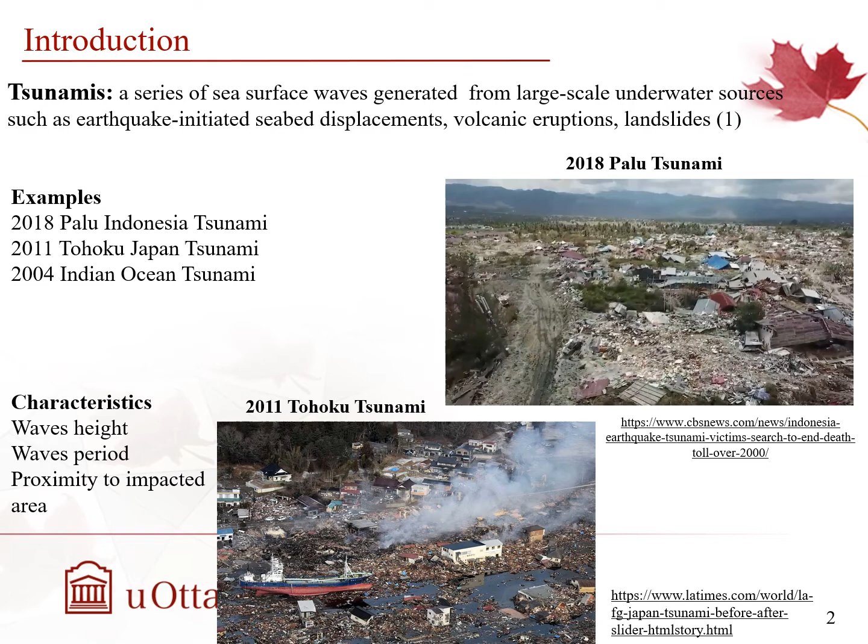In my study, we tried to see how different bore depths and also bed slope and bed conditions can impact on hydraulic characteristics and pore pressure variation and scour erosion around this structure. For this purpose, we measure time history of flow velocities and water surface elevation with different tsunami-like bore depths and two different bed slopes and two different bed conditions, which were

wet versus dry. Also, we measured the time history of pore pressure variation around the column at the same time with measuring the scour development around the same column as we had identical hydraulic condition, two bed slopes and two bed conditions.

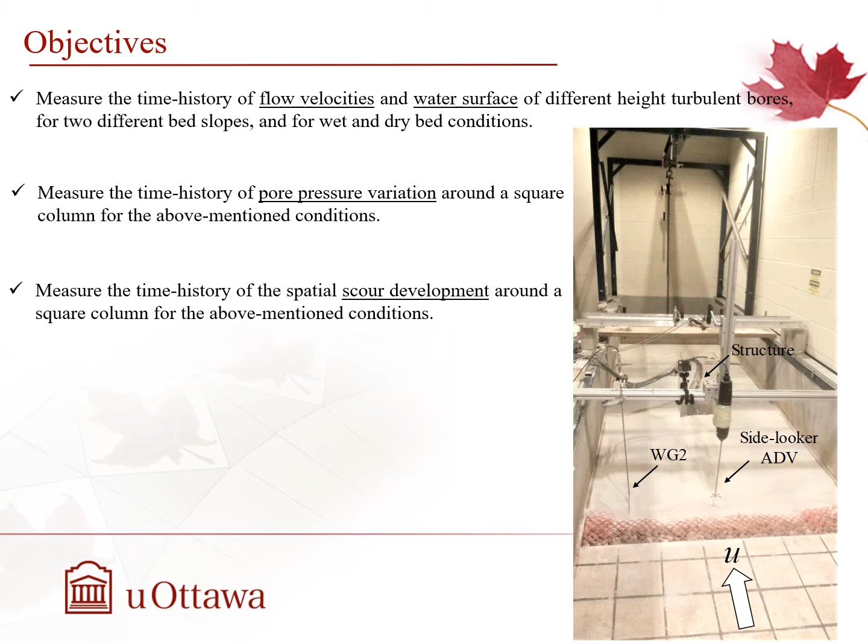Before starting my study, I tried to see what kind of related investigation happened in the past. I realized that in 2019, McGovern and his colleagues performed multiple experiments to see how tsunami-like waves can impact on scour development around the building, which was placed in horizontal bed. And these waves were generated using a wave generator.

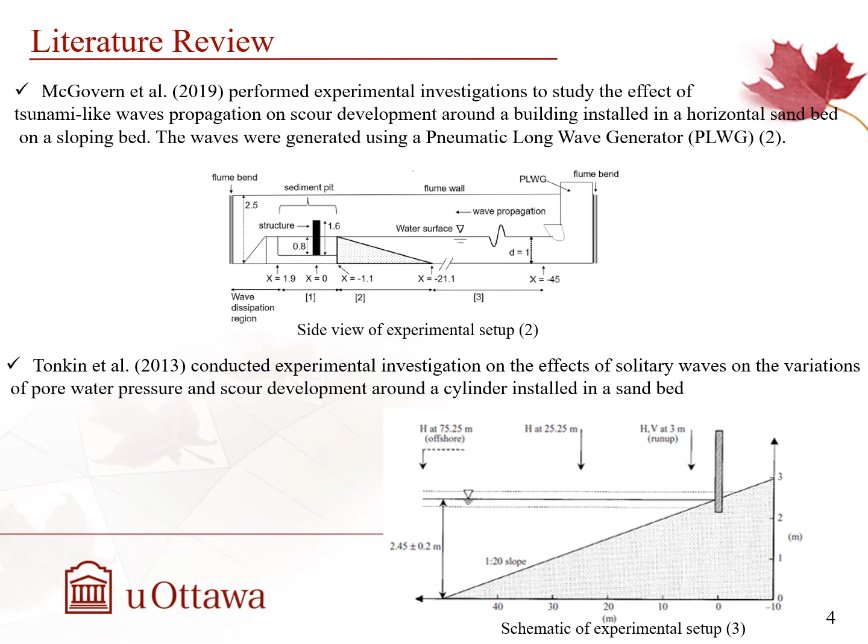And finally, in 2008, Nakamura and his colleagues also did experimental investigation to realize how solitary waves and isolated waves are impacting the variation of pore pressure and scour development around the structure installed in horizontal bed.

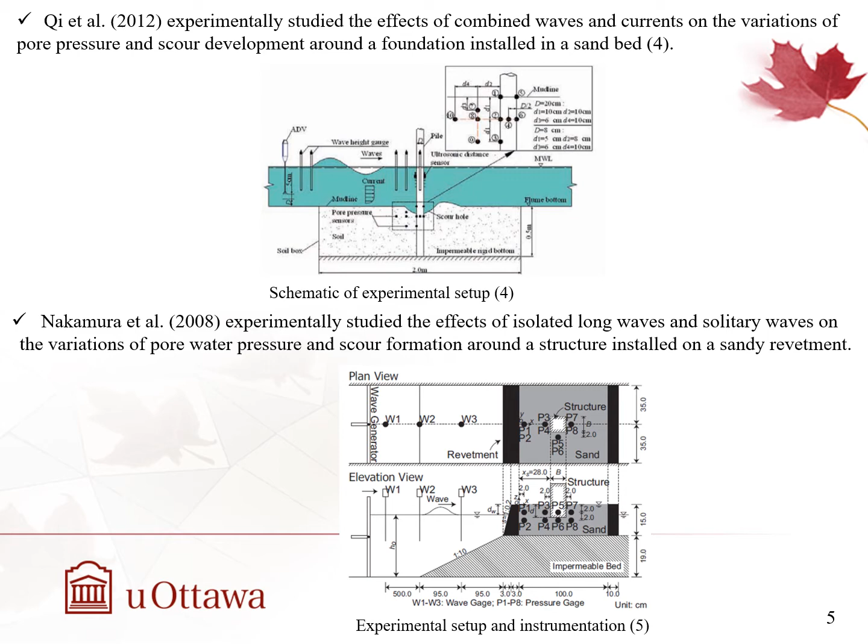By analyzing the conducted investigations in the past, I realized that in all cases, tsunami bores were simulated as solitary waves, currents, regular waves, or isolated waves. And the analysis of some field investigations showed that these kinds of waves cannot experimentally represent real tsunami waves. However, the analysis of this field investigation showed that the dam break method is the only method to replicate tsunami waves in experimental scale acceptably.

On the other hand, looking at the previously conducted experiments showed that in some cases they just look at the scour or they just put the column, like their structure, in horizontal bed. This is where novelty came into my research. We use the dam break method in order to simulate tsunami waves in experimental scale, as in terms of the hydraulic characteristics, dam break waves and real tsunami waves have acceptable agreement with each other.

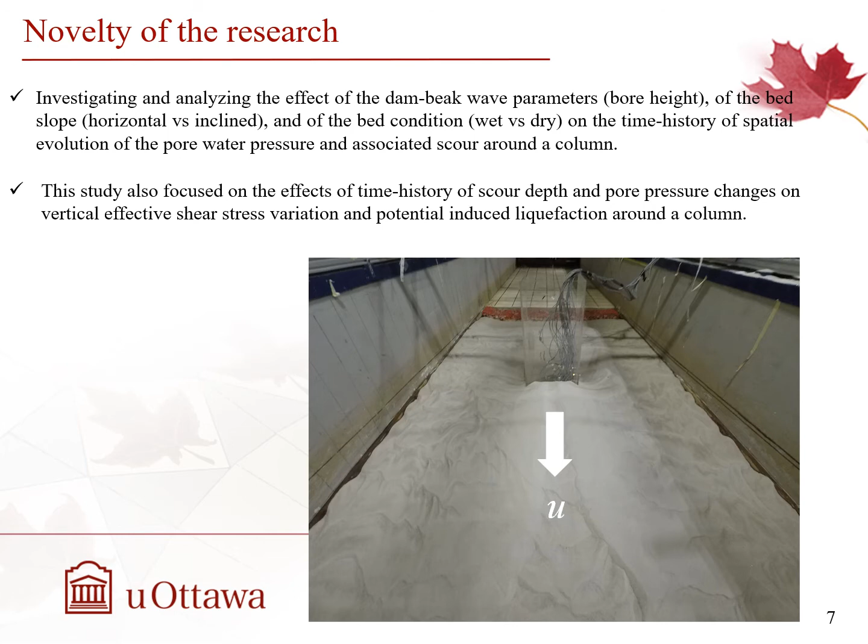On this slide, you can see the experimental setup and instrumentation that I used to perform these experiments. I did my experiment in the hydraulic lab at the University of Ottawa, and there is a flume with a length of 30 meters, which has an almost 22-meter reservoir, and right after that, we installed a swing gate, and after the swing gate, we had an upstream false floor with the purpose of calculating bore front velocity and bore surface velocity. At the end of the flume, we had a downstream false floor, which helped us to have a framework for implementation of a sediment section.

And right at the center of this section, we placed a transparent column, and by putting one camera inside, we have been able to record the time history of scour evolution around the structure. We installed 19 tensiometers on the front side of the structure in order to collect the time history of pore pressure variation for this face, and by rotating this column 90 degrees, we recorded all these numbers for the side face.

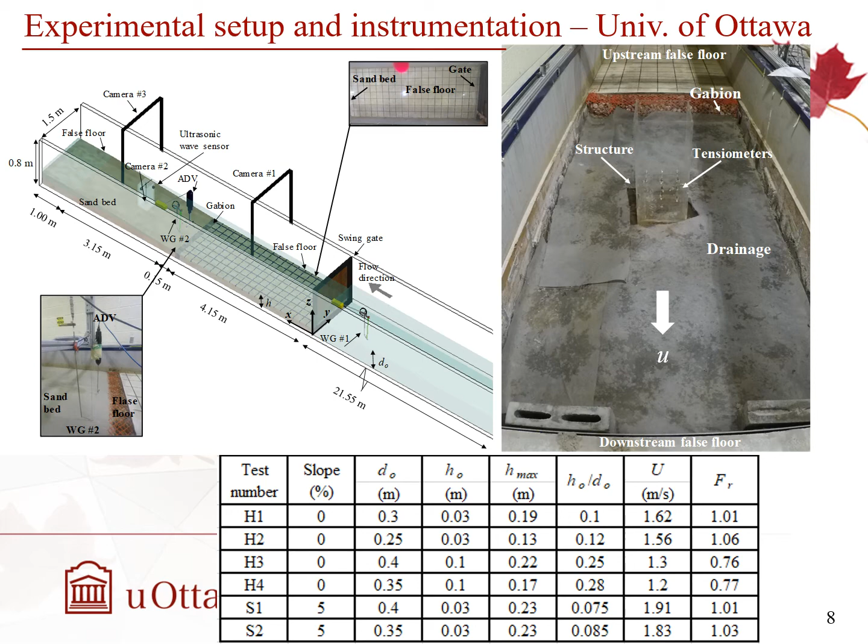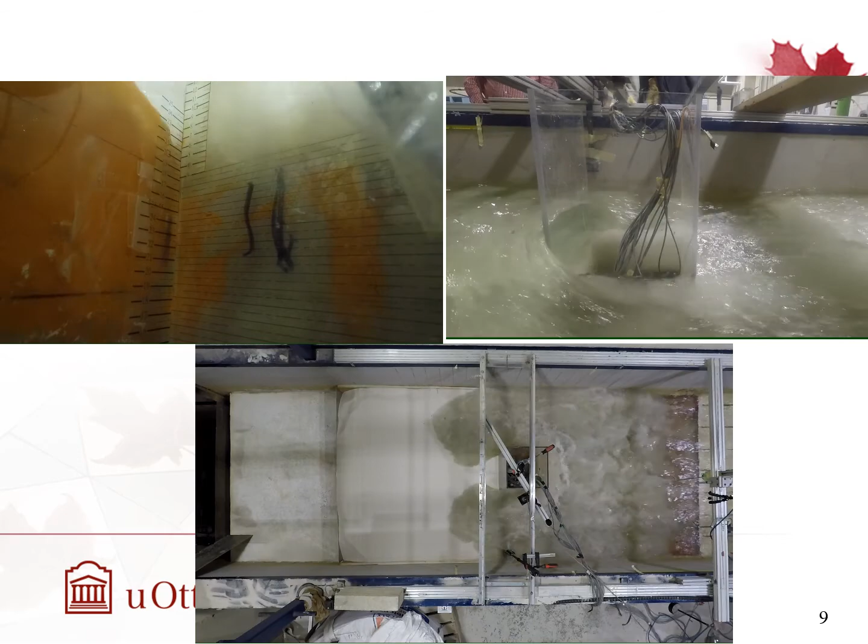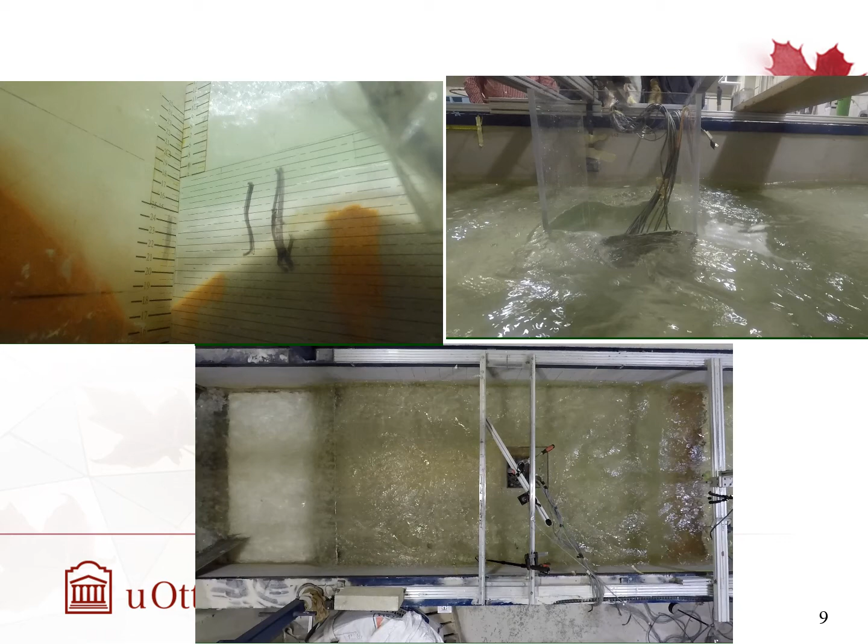As we had different bore depths, two different bed slopes and two different bed conditions, we had different flow velocity and flow depth, which gave us different Froude numbers. So based on these different Froude numbers, we categorized our experiments into supercritical flows and subcritical ones. As you see in this slide, once we open the gate, the dam break bore is generated, and it traveled and propagated over the sediment section, and by its propagation, scour happened and pore pressure changed at the same time.

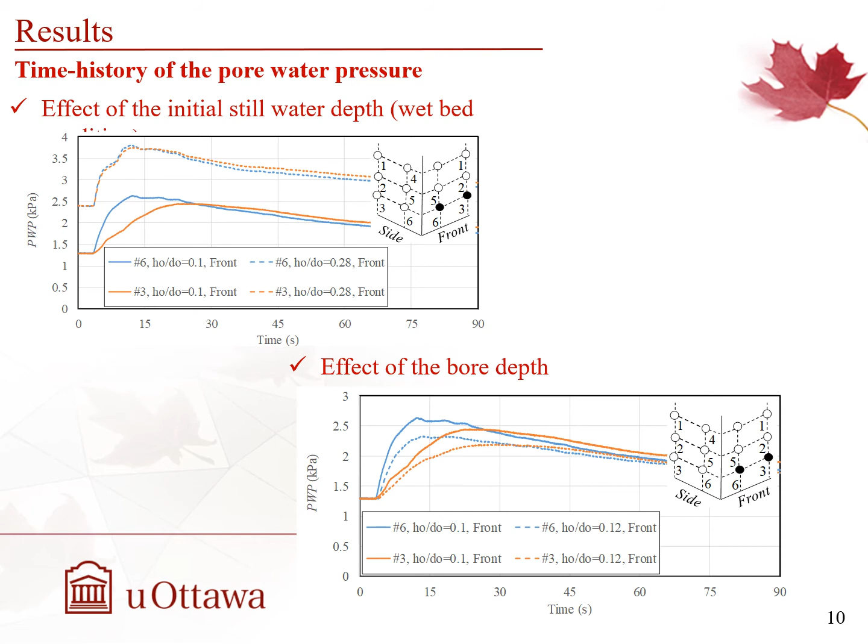Once we collected all these data and numbers, we started to analyze them. First of all, we started with pore pressure variations. In terms of the effect of initial still water depth, we figured out that as we increase initial still water depth, we had greater pore pressure values around the structure. Moreover, as we increase bore depth, we had larger pore pressure values around the structure.

In terms of the effect of location of tensiometers, the analysis of collected data showed that regardless of bore depth and bed slope, the front face of the column always showed greater values of pore pressure compared to the side face. Moreover, we realized as we increased bed slope by 5%, the values of pore pressure around the structure doubled.

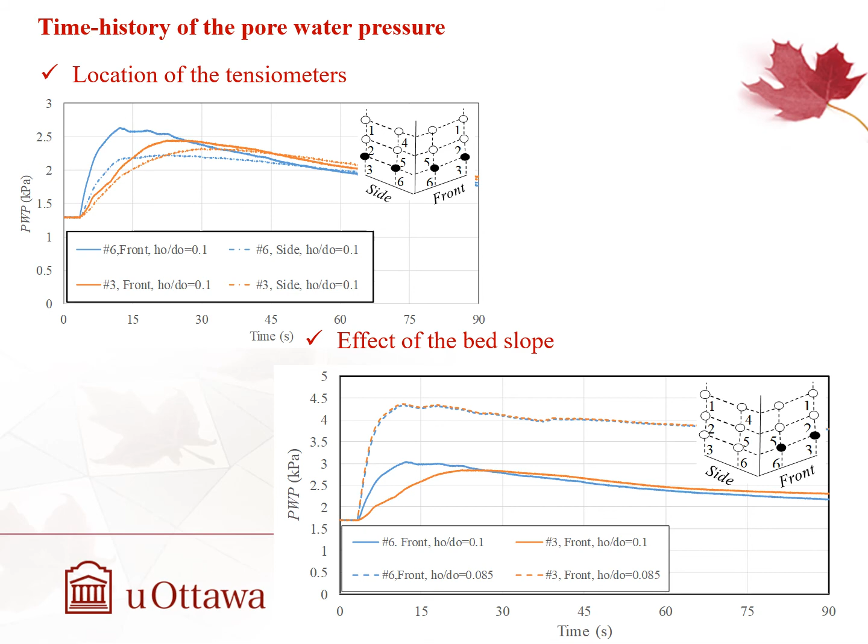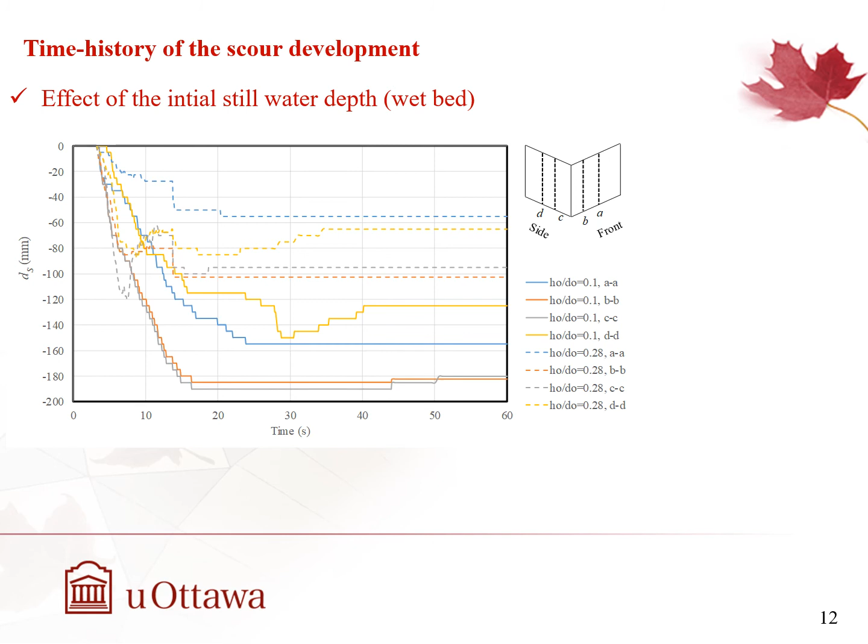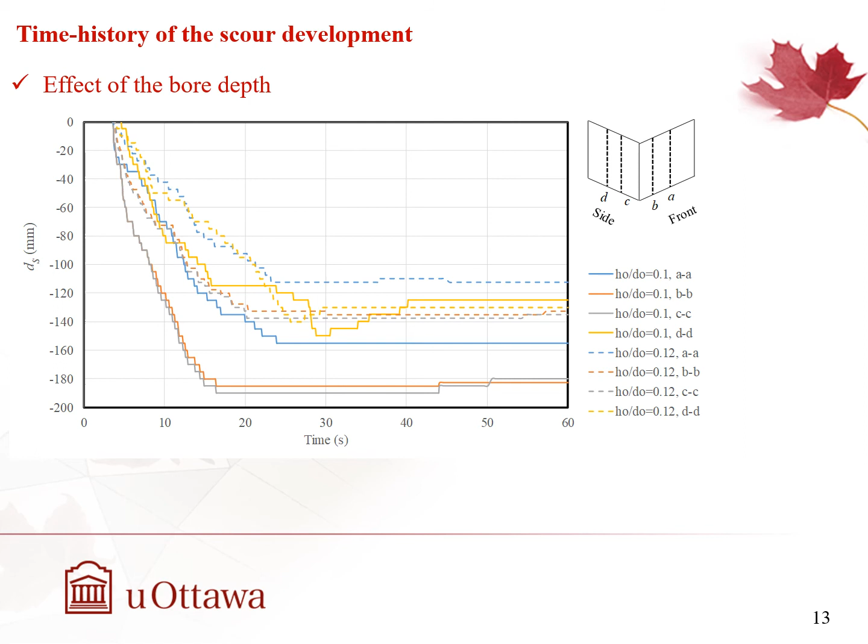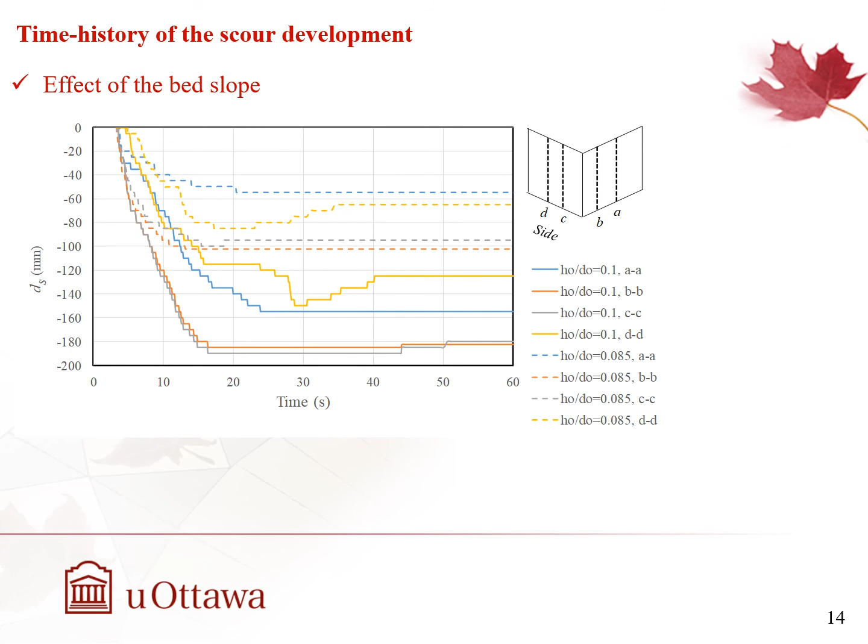In the second step, we analyzed the results of scour development, and in terms of the effect of initial still water depth, we figured out that as we increase initial still water depth, it actually mitigates the scour depth around the structure. But when we increase the bore depth, it caused an increase in scour depth around the structure. And when we increase bed slope by 5%, it actually decreased the depth of the scour hole around the structure.

After analyzing these results, we conclude that the time history of pore pressure variation increased as we increase initial still water depth and bore depth. However, increasing initial still water depth mitigates scour depth around the structure. For all investigated bore depths, we always had larger pore pressure values on the front face compared to the side face. And also, with a 5% increase in bed slope, we had 2 times larger pore pressure values around the structure in the inclined bed test compared to the horizontal bed test.

For identical hydrodynamic conditions, scour depths were deeper for the horizontal bed compared to the inclined bed test, and for all investigated bore depths and bed slopes, scour depth was significantly deeper in the corners of the structure compared to the front and side faces of the structure.